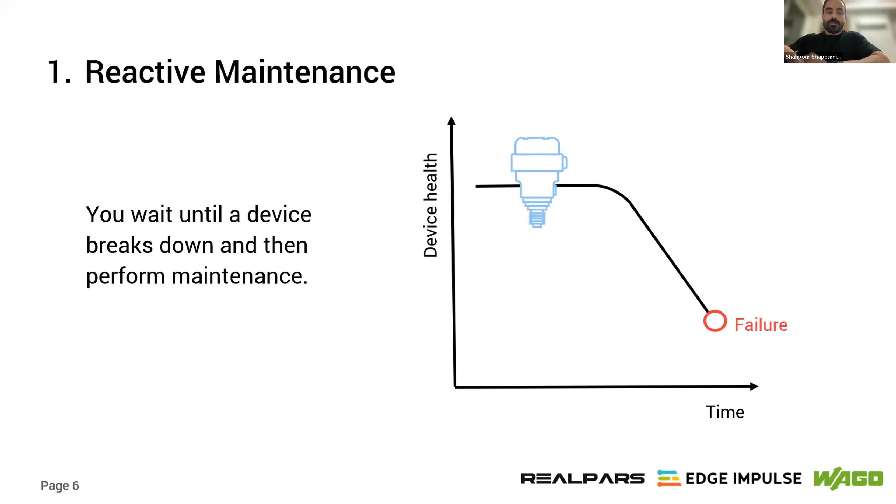Yeah, good. So with reactive maintenance, you wait until the device breaks down and then you perform the maintenance. That's why we call it reactive, because we just wait and then react when the device gets to the point of failure. Next we have preventive maintenance, which is when you try to perform maintenance long before it gets to the point of failure.

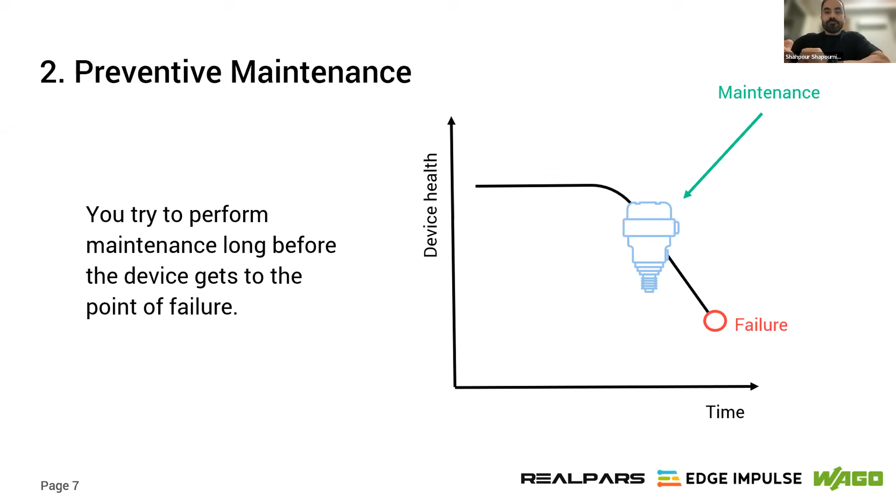Mihajlo, if you click, yeah, good. So you see that with preventive maintenance, we perform the maintenance long before it gets to the point of failure. But there is one main issue with preventive maintenance: you waste device life that is still usable. So this is money you're leaving on the table. You're not using your device lifetime fully.

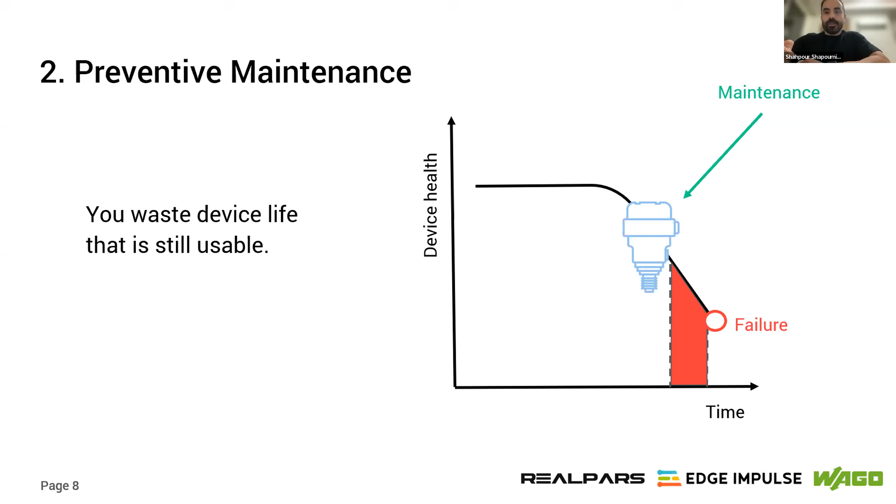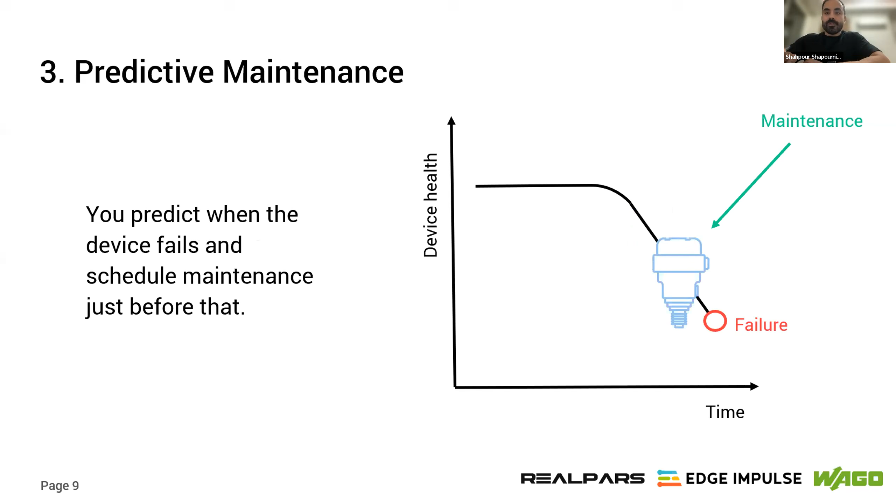To solve this issue, we have predictive maintenance. With predictive maintenance, you predict when the device fails and then schedule maintenance right before that, so you have less waste of device life in general. If you go to the next slide, Mihajlo. Yeah, good. If you go back to the previous slide, as you can see, the lifetime that is wasted when applying predictive maintenance is way less than what we had for preventive maintenance.

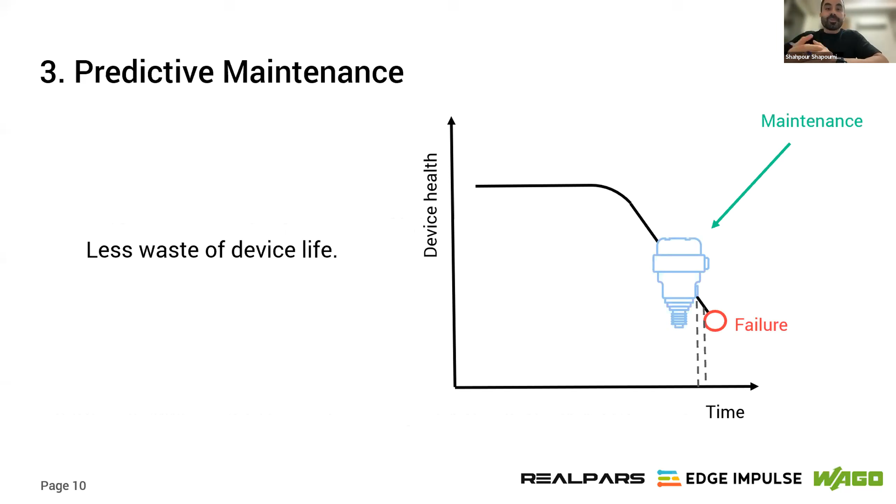Now, predictive maintenance is such a buzzword these days, and everyone is talking about it. And there is a reason for that. Some data that we have shows that the predictive maintenance global market size by 2026 is going to be about $21 billion US. This indicates how important predictive maintenance is and how important it is for us to learn about this topic.

Now, there are some industries that are benefiting the most from predictive maintenance, and we have some of them here. If you go to the next slide, Mihajlo: we have automotive, aerospace, and energy. So this was just some basic information to get you familiar with the concept of predictive maintenance, and I think it will help you better understand what Jan is going to present next, which is some real-world challenges we are facing these days in implementing predictive maintenance for real-world industrial applications.

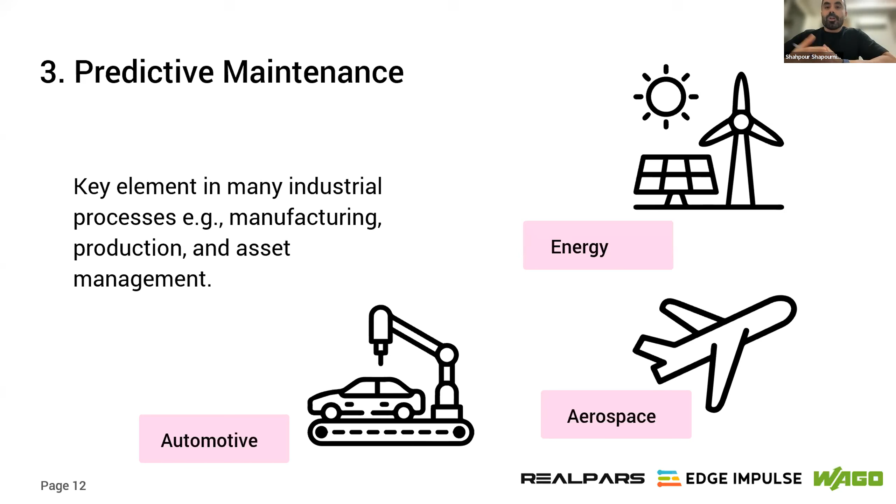Great. While we are transitioning to Jan, one more comment from my side: this importance of predictive maintenance is especially important in a period of potential economic downturn, because it really makes sure that we have a longer remaining useful life. That is the key driver for anyone in manufacturing and production to keep their existing stock of machines in operation as long as possible. That is why predictive maintenance is definitely not just a buzzword, but really a trend which is going to stay with us. With that in mind, why don't you, Jan, take over?

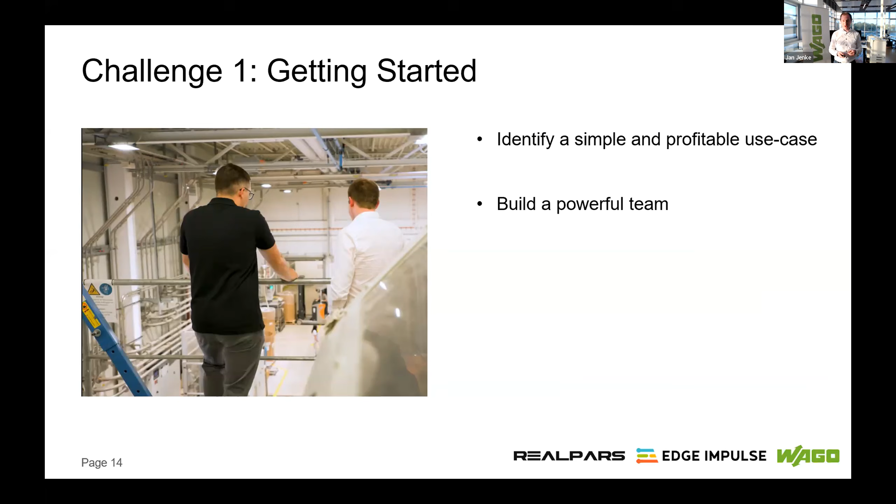It should also, of course, be profitable, because otherwise you can't convince your management that you should continue working on that. And next, build a powerful team. I will show you how we solved that on a real example. This example is from our own production, and it was a project where a colleague of mine working in my team was also getting started, like you, probably.

In this project, it was very similar to your vacuum cleaner. You probably don't really know when is the best point. You don't want to do that maintenance job too early, but if you do it too late, you're wasting energy and efficiency. And we need to build a team. And this is really the same for all predictive maintenance challenges. You should definitely include a process expert, because, as Shahpour presented, you want to measure the device health. And what is the device health? If you don't know, ask a process expert and involve him or her in your team.

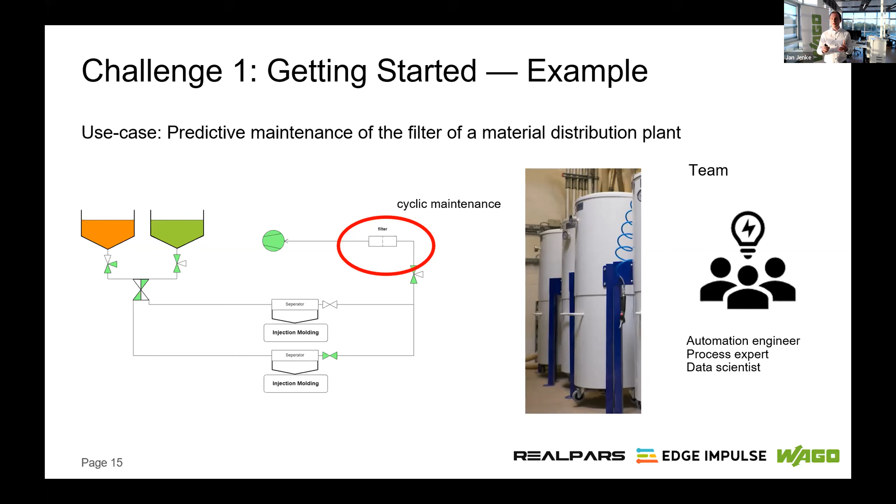You maybe are working in this project as a data scientist. You want to develop algorithms. This one definitely has to be included. And an automation engineer: if you want to include everything in your PLC logic, then you need to involve him if you are not one on your own. That's a perfect combination, and really work together in this project.

Challenge 2, of course, is getting the right data. Predictive maintenance is all about data. So you really need to connect the relevant data sources, and which data sources are important? As we want to measure, as Shapour explained very well, the device health, we need to have all the data related to the device health. You probably don't have a sensor that can directly measure the device health. So you discuss with the process experts what the device health is about, and then maybe you have to add some sensors or include existing sensors to have a good description of the device health.

And in reality, often you have a production process like ours or something else, and of course you can't measure the device health when the machine is already in a maintenance state, or if it's simply not working. So often you need to include the machine state. So you have to somehow get information about the state of your control system. And next, of course, recording the relevant data. What is it in the real example of our very simple filter?

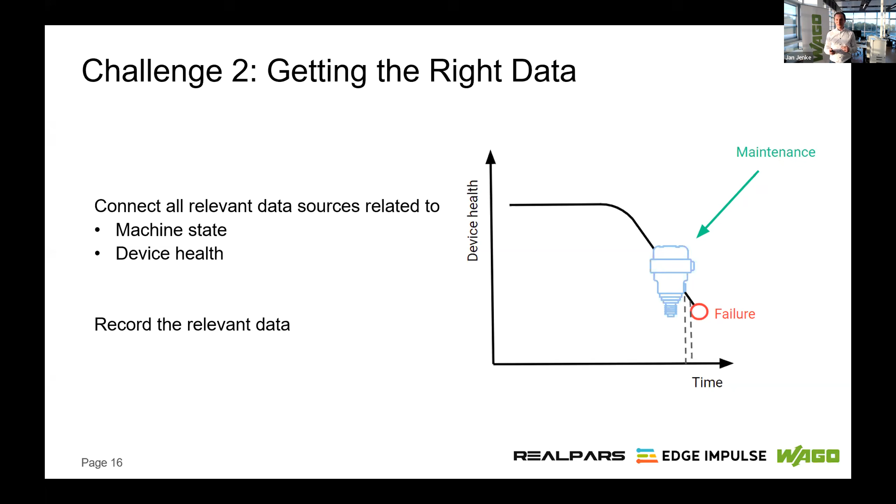So the device health, as you can imagine from your vacuum cleaner at home, the pressure depends on the amount of dust in the filter. So in this case, we measured the pressure in front of the filter and behind the filter.

And this we did in this case with a controller, a PLC, which could be of WAGO, could be of any other company. And we did it in this case with the existing control system. This controller was controlling this whole plant, and we simply added this data. You can, of course, if it's not possible to enter this existing control system, add a different device to get the relevant data, and you have to store them. So in our case, we used an industrial PC for that purpose.

We put an InfluxDB, it's a time series database. It's open source, and for visualizing the data, we use Grafana, which is also open source, so that you don't have an investment for these things. Maybe it's a benefit in your first project.

So, and then, as you see, here it's a sketch, but we see the differential pressure where no maintaining is done was increasing with the operating time. So probably as the time is increasing and this differential pressure is increasing, probably it's related to our device health.

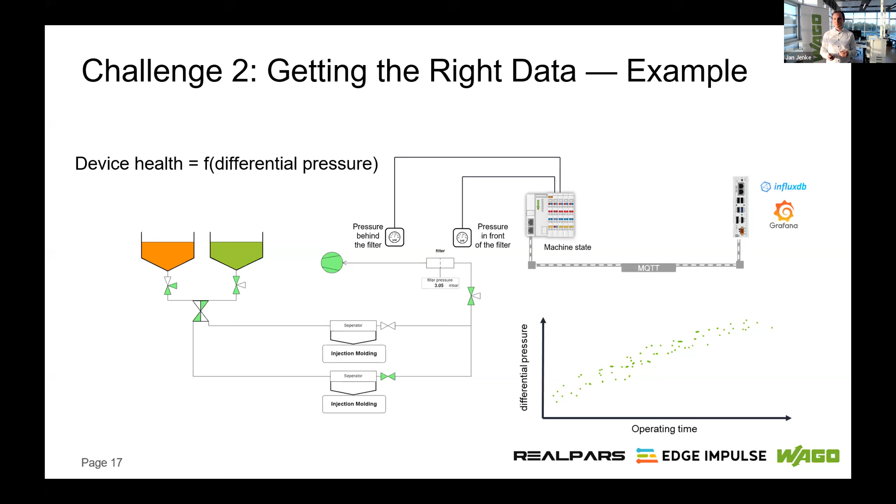Challenge 3. Challenge 3 is probably new for most of you. It's about developing the algorithm. If you want to do it on your own, and I think at this part also, of course, Edge Impulse could help you. But if you want to do it on your own, you have many approaches for that. And you have to choose the right machine learning algorithm across many. So machine learning, many things exist also in the open source community, but there exist so many things that it's really hard to know what approach may lead to the best result.

Second, you have to calculate somehow the device health. And up to now we talked only about the differential pressure in this example, and define a critical value, and you want to forecast when will this critical value be reached. And then predict when the device health reaches this critical value for scheduling predictive maintenance.

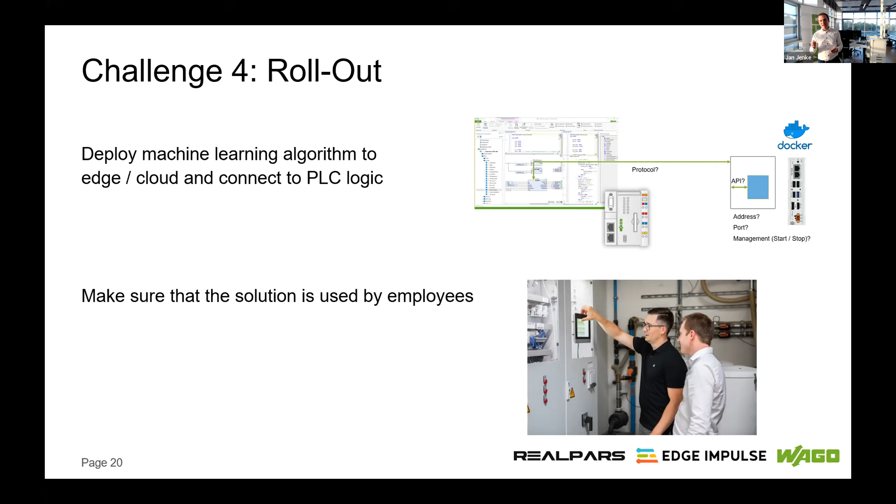Next thing in rollout is make sure that your solution is now used by the employees. It can't be that you just develop the algorithm, say, okay, everything is working, but nobody is using it in the real production. So make sure of that. How did we solve that?

So we set up an infrastructure on our edge computer, receiving the data from the controller, putting them to the machine learning algorithm, putting it back, sending the maintenance order also to our existing maintenance system, because of course, probably you have already some maintenance system. So you need to really connect it there. Otherwise, you're building a new maintenance system next to the existing one and nobody would use it.

So this is a very important point, but in many companies, you will get the support for doing that. And talk to the machine operators and all the users which are involved in your solution. Ask them for feedback, motivate them to use it, and implement their feedback in your solution.

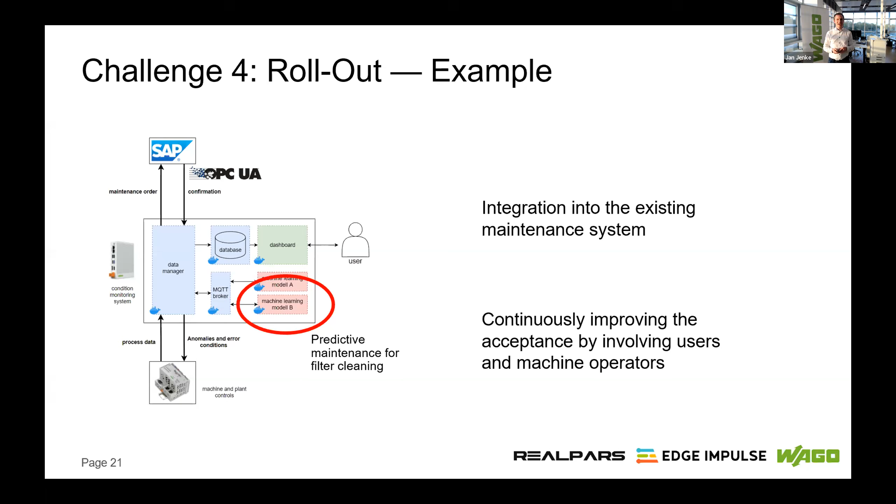Now, the last challenge. Challenge 5. Challenge 5 is just keep going. I mean, you have to go on.

Now you solved your first predictive maintenance project, but in real world scenarios, it's probably only one piece of a whole chain. And when you did it, transfer the knowledge to your colleagues. You did something very good, talk about it, and spread your knowledge so that not only you can solve the next predictive maintenance project, solve it with your colleagues and establish really predictive maintenance in your company.

So yeah, that's all. So 5 challenges which you have to solve, and I give my best that you can solve them on your own the next time.

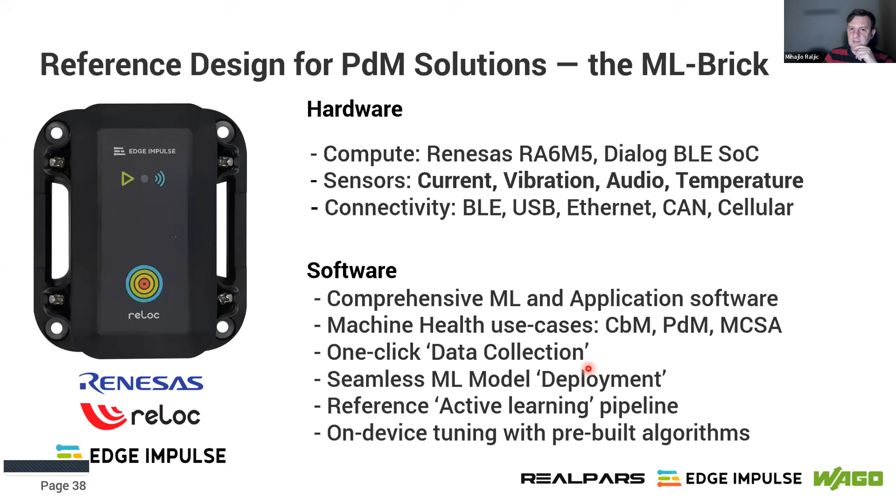And it's really all a ready-to-go solution. It's a one-click data collection exercise. So it's really, really fast to get you kick-started in that process. So with that, I can stop sharing, and I hope we have some time left for Louis.

For this, as I've seen a couple of questions of I need a lot of data to get started, etc. This is actually not true. You can start importing data in many different ways, and you can even use your mobile phone just to listen to tiny vibrations or use audio. This actually works great if you want to demonstrate just the value of what you want to build.

Then once you've got enough data, so here only two classes, I will create my impulse. Mihajlo said it right just before. So I've got my data on the one hand. I've got some spectral analysis. This is DSP, so digital signal processing techniques that I'm going to use to, let's say, ease the raw signal and provide interesting features to the neural network.